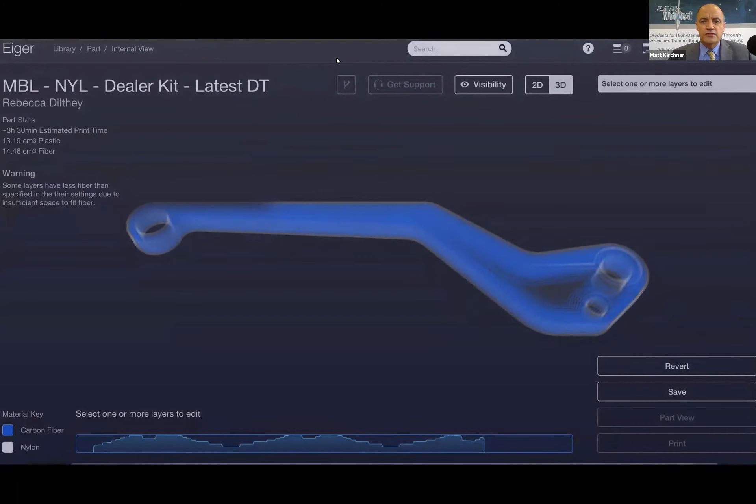Well, that day that we dreamed of started coming, and my view of additive manufacturing started to change. A couple of years ago, I took a trip out to the state of Massachusetts, to Boston, to meet with a gentleman by the name of Greg Mark. Greg, at that time, had founded and was the chairman and CEO of a company called Markforged. I could tell right away after I had the opportunity to meet Greg and Jason Rose and other members of their team that this company was different, that they were looking at additive in ways that nobody else was looking at additive.

Instead of thinking about how do we print a little figurine, I heard him talking about things like printing work holding fixtures for CNC machines and end of arm tools for robots. Those were the applications that I saw in additive manufacturing. They even had the guts to tell me, as I continue to believe, that additive may never replace technologies like injection molding or die casting or machining for all applications, in part because of the cost associated with additive versus traditional methods of manufacturing. But using additive manufacturing to augment the world of manufacturing and to print parts that otherwise could not be manufactured, that's where the future was. And that's where we got interested in Markforged.

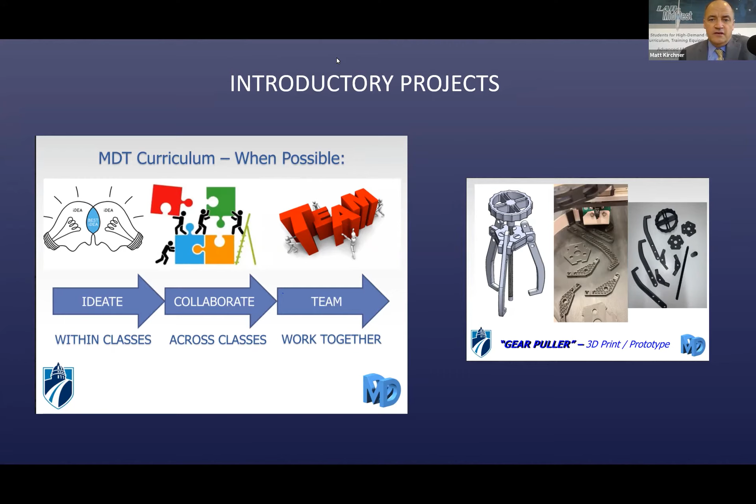Absolutely, I love that. And really in the same sense as Sean provided, exposure to not just the application, not just the printing, but really the design side of it and the problem solving side of it. There's just so many great opportunities for us to teach these competencies using additive manufacturing and 3D printing. So great example, Ron.

I want to stay with you for the moment and play off the whole Yoda topic. Again, nothing against Yoda and nothing against getting young people excited about additive, getting excited about STEM using 3D printing. But give us some examples of authentic design process opportunities where students are really learning that application.

Yeah, well, first of all, one of the other instructors, Ryan Ubersax, does an outstanding job with our first year students, just teaching them our design process. So we have our own adapted design process model that we designed for our program at Madison College. Ryan introduces that design process to our students, and then we try to carry that theme of how things flow through a design process. So instead of just randomly downloading something, we're always looking at how does it fit?

When it comes into the design process, what are customer requirements? What's the design for X? How does it have to meet the end objective? And then how do we take it through the sequential steps of that design process? Throughout the program, design is just inherent in everything that we do, following a process.

And one of the things you see on the screen is a capstone design project for making cheese curds. We had a team as a capstone project last year that took a Nesco cooker and designed an insert vat type system that would go in and make cheese curds. They were on a phenomenal track of designing that last year when COVID hit, and unfortunately we didn't get to the end result and never got to taste those final cheese curds. But they were following a design process, and this is their concept drawing that really lays the foundation for all the project management and the planning that would form the base for that design process. So I can't stress design process enough in everything that we do.

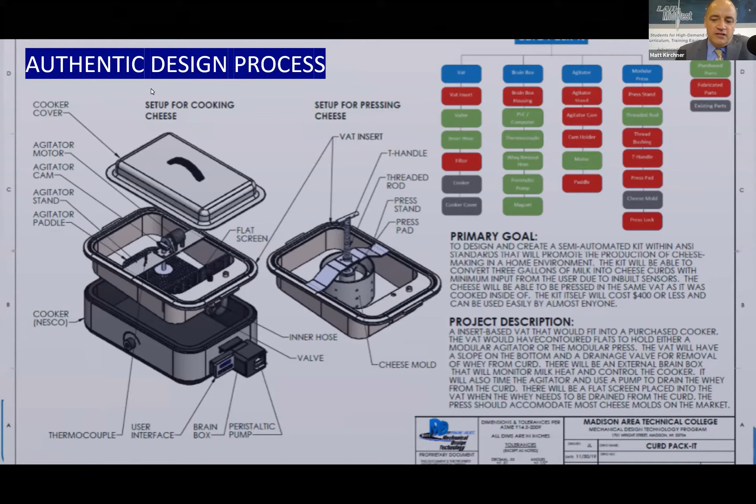There you go. So Sean, I'd love to pose the same question for you. Talk a little bit, especially at that high school level, about how we drive home the authentic design program and process for your students.

What works well for me is to include more specifications or constraints on whatever product the student is designing. I wrestled with that a little early on in my career, but I found it really helps to give students an actual scenario. For example, with the coin separator, I tell them, let's go out to the parking lot, go through your cars, pull out the change you find, and now let's design something that will actually solve that problem. It works really well to give kids an actual scenario or design challenge, and they get pretty fired up about it.

And then with that, they prove their designs and explain why they made them a certain way.

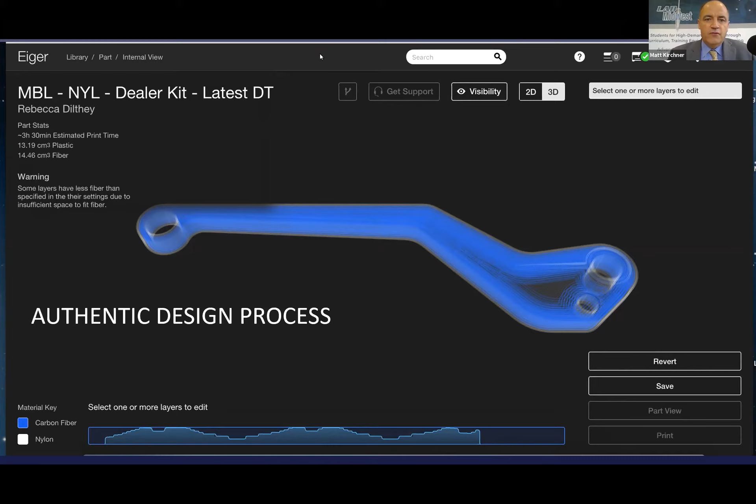Absolutely. Moving from the authentic design process into this idea of what competencies we're teaching, which I think are probably closely related to that design process. In the interest of time, I want to make sure I give both you and Ron plenty of time to show off your capstone projects. So maybe in a 30-second answer, can you share some core competencies your students are learning in your program?

Well, a lot of mine are aligned with the Wisconsin Tech Ed standards. Just for example, with the coin separator, we're talking about accuracy and precision, identifying the differences, talking about tolerance, applying measurements to a specific design, defending their design, justifying why they made it the way they did, and being able to collect data—in this case, measurements of coins—and incorporate that into a successful design.

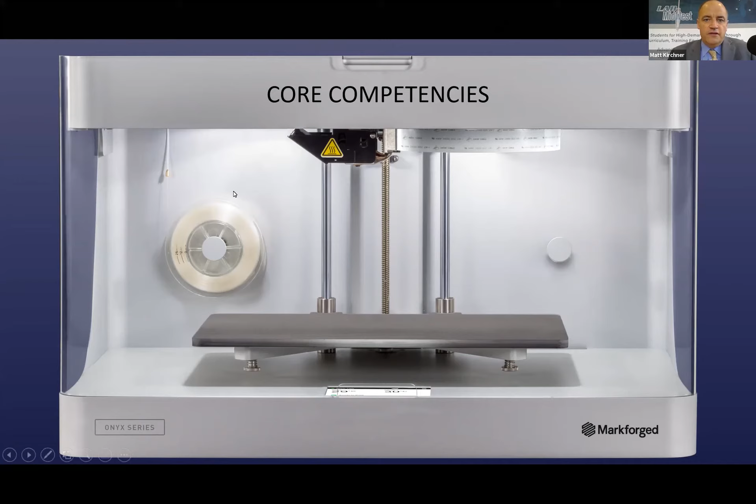Perfect. And Ron, same question for you on core competencies. How do those differ at the community college or technical college level? Just focusing specifically on rapid prototyping, you can see on the screen the major competencies in bold—numbers 1, 8, 15, and 20. We have four different types of 3D printing processes that students are introduced to, so they get a wide variety of technology they're exposed to.

One of the biggest things I see with 3D printing, as it relates to the competencies, is where you're using the 3D printing and where you are in that design process. For example, this piece I printed today had a problem with the fit—there's an Acme thread here and a piece with the thread onto that Acme thread. Our manufacturing tolerances are a bit different than our 3D printing tolerances, and sometimes we have to adjust our sizes just to get a working model that fits the 3D printing process. One student didn't quite give me enough tolerance here, so I couldn't screw it on as easily as I could.

So that's one thing to consider: what are you designing for? Is it 3D printing, or is it for manufacturing?

The other thing we really like to emphasize is shown in the top right slide. I had a student last year who downloaded a full model of a Briggs and Stratton engine. But he broke that model completely apart and used SolidWorks to model every component. That's fully 3D printed—what you're looking at is a model that turns, the shaft rotates, the piston goes up and down. It's phenomenal.

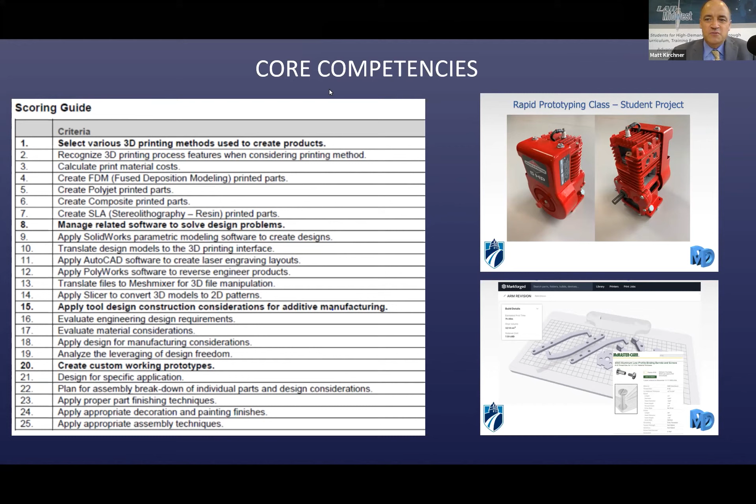Very impressive. So speaking of students and great things they're doing, I wanted to talk for a moment. Sounds like we're in a high school, right, Sean, with the speaker going on? Sorry. No worries at all.

That's what it's about, learning at work. I want to talk about capstone projects, and I've been in both. Certainly I've been in Ron's program, and Mike Dietrich has spent time in yours, Sean. Ron, tell us about the capstone projects your students participate in as they cap off their learning before heading into the world of employment.

Yeah, Matt, we've evolved over the last 5-6 years in how students present their projects. We're talking about a second-year project intended to incorporate lots of aspects throughout the program, with collaboration with other programs. We try not to be the end-all—design it, build it, wire the electronics. We like to get our electronics program involved when possible, our machine program involved, even our culinary program depending on what we're looking at. So how can we simulate an industry and be like a design department working across different departments?

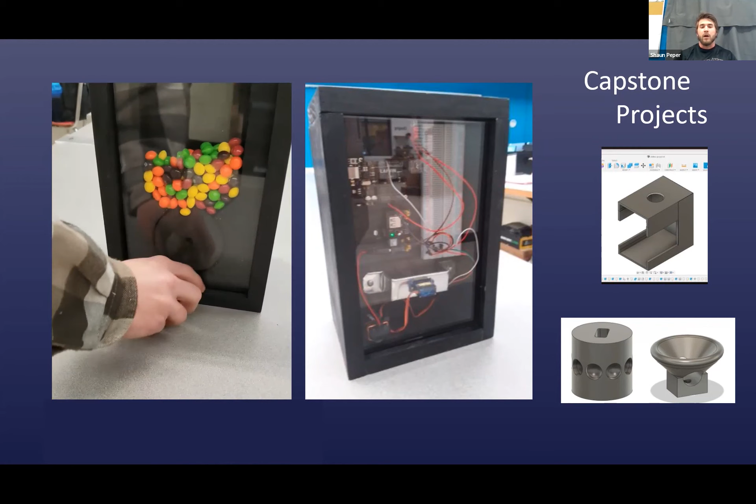Along with that project, they'll be using all of the other equipment that they've learned. You can see the plexiglass there, that was cut out using the laser engraver. Some of the parts on the side were cut out using the CNC router. So we're incorporating all of the equipment that the students have learned, and a lot of the concepts they've learned from doing smaller projects earlier in the school year, all into one project here at the end.

And they usually end up being pretty cool, and it's really interesting to see what the kids come up with, because a lot of the time it's something I wouldn't have even thought of myself. They end up being a lot of fun, the kids like it, and I think they learn a lot from it.

So quite a bit further along than that Yoda program that I saw in the high school about 5 years ago, right, Shaun? That's absolutely incredible. Yeah, and for our audience that recognizes that technology, obviously just a tremendous amount of mechatronics and high-tech, advanced manufacturing related technology that those students are learning in the program.

I'll tell you, my biggest regret today was that we didn't have more time carved out for our two guests. This has been a really interesting conversation. I think we probably have another 3 or 4 questions that we'd like to get to on another episode. So let me ask Shaun and Ron, by a nod of the head, would you be willing to join us again sometime to share the rest of this information with our audience? That would be absolutely fantastic. I think, Ivan, again, in the interest of time and our commitment to keep these right around a half hour for our audiences, we're going to duck into our conclusion here.